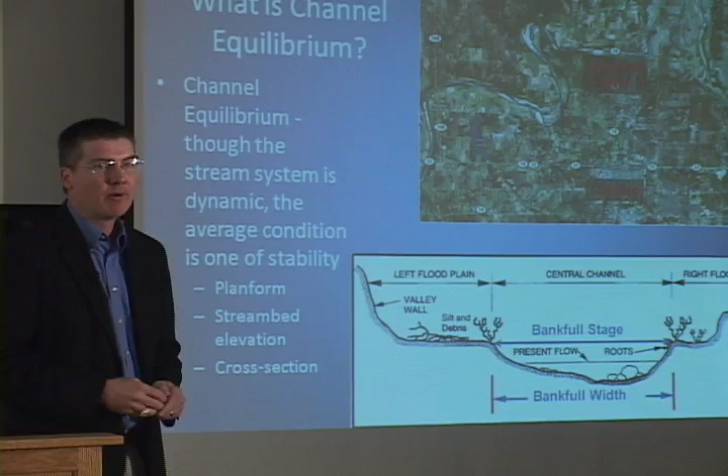What I want to start off by saying is I want to start with a bigger picture view of streams. Streams are dynamic, okay? The pictures you saw today, the aerial photo and the stream moving, okay? Streams want to move, all right? They don't want to stay in place. They do want to get to an equilibrium state, but that equilibrium state is one where it is dynamic, okay?

And streams have a different equilibrium, or a different dynamic state, associated with them. We can talk about that in terms of plan form, but we can also talk about it in terms of stream bed elevation, okay? So stream bed elevation can change, it can move up or down. And we can talk about it in terms of its cross-section, okay?

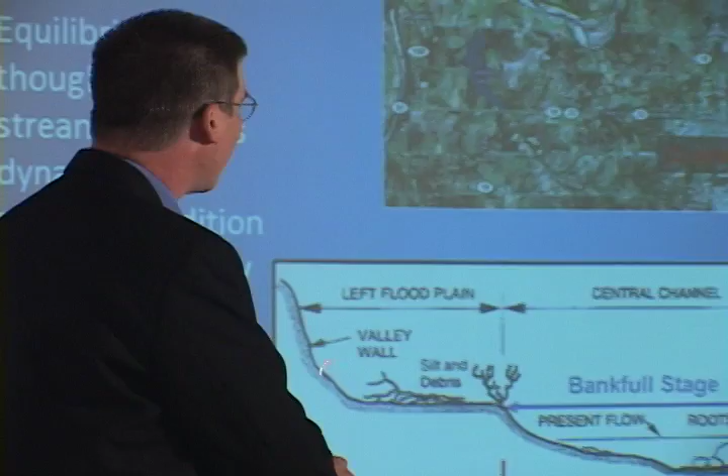Streams are not intended to be channels that look like open pipes where the water just runs through. They are actually supposed to spill over onto their floodplain, because in a lot of cases we have floodplains that have vegetation on the surface, right? And that vegetation interacts with that water and it interacts with that sediment, okay? So we need to keep these things in mind when we start talking about stream systems.

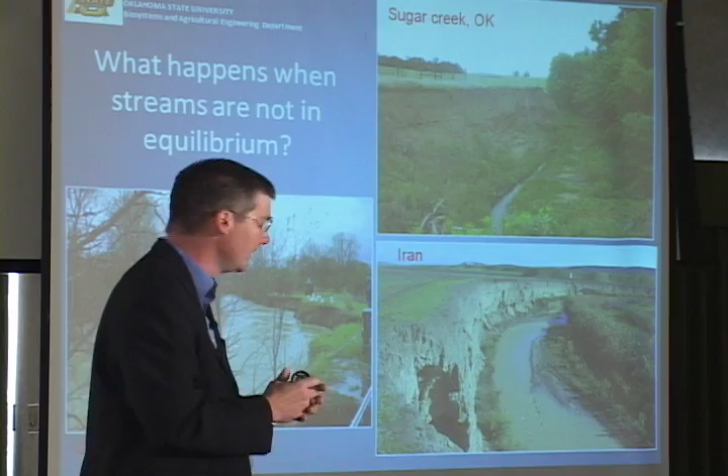Now there's a lot of different ways streams can get off of this equilibrium, and a lot of different ways you can start getting issues with streams, where they can start migrating faster than maybe what they naturally should, however we might define natural, okay? Some of those disturbances include in-channel disturbances, okay? Anybody had any streams straightened or dredged, okay? We have those issues in Mississippi, we have those in Oklahoma, okay? That can throw a stream off of its equilibrium, okay?

Ag activities, okay, can have an influence on what happens with streams, either positive or negative. Urban areas, somebody mentioned urban areas in the back, okay? When you have an urban area and put increased impervious surfaces on the landscape, that water's got to go somewhere. It's not going into the ground, it's going to run off into the sewers, and then eventually from the sewers and drainage ditches, right into the stream. And it's a very high carrying capacity for water and sediment.

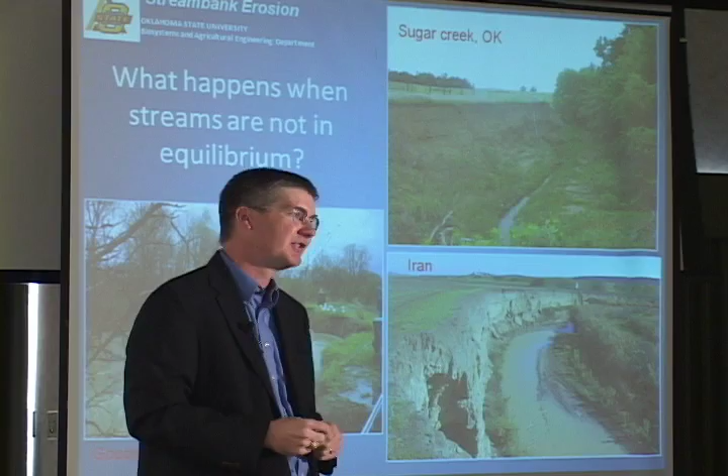These are some of the streams that we've studied or investigated or played a role in, in several different parts of the country. Goodwin Creek, Mississippi is probably one of the most famous studied stream bank sites that I know of. There's more data at Goodwin Creek than any other stream bank site I've seen. This is Sugar Creek in Oklahoma. It's a sugar sand, and if you can only imagine how fast the soils erode there, if you're talking about a sugar sand. And we've also looked at pictures from Iran, pictures from Iraq, pictures from all over the place where these processes are occurring.

And when streams get out of equilibrium, what ends up happening is you see these very steep banks, okay? Because they can get out of equilibrium in several different ways. One way is the stream bed can actually cut further and further down. Now from what I understand about your Minnesota rivers, you kind of had a glacier that helped to do that a little bit, right? But that's a process where the stream got kicked out of equilibrium.

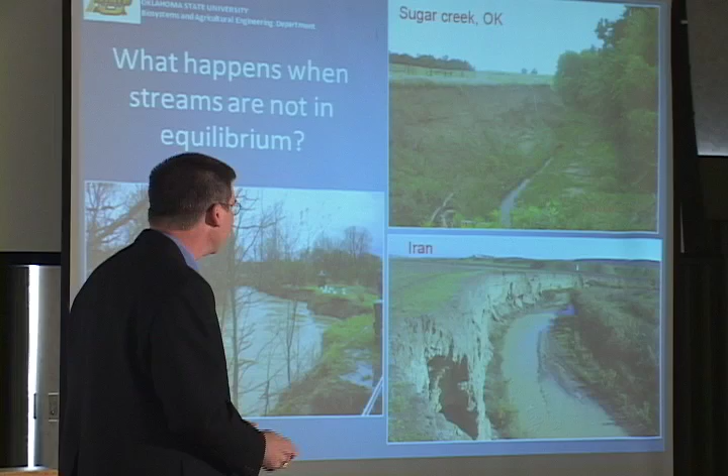Okay, but when they get steep, then these banks become very unstable. What I'm going to try to do is give you some fundamental background about how we can quantify some of that stability. Now there's something that has been developed by researchers across the country that talks about the migration, the patterns, and the processes that streams undergo.

That's referred to as the channel evolution model. It consists of basically 6 different stages. Stage 1 is a pre-modified natural channel. The bed's probably pretty stable, or it could actually be coming up—we could be having aggradation on the bed surface—but that's stage 1.

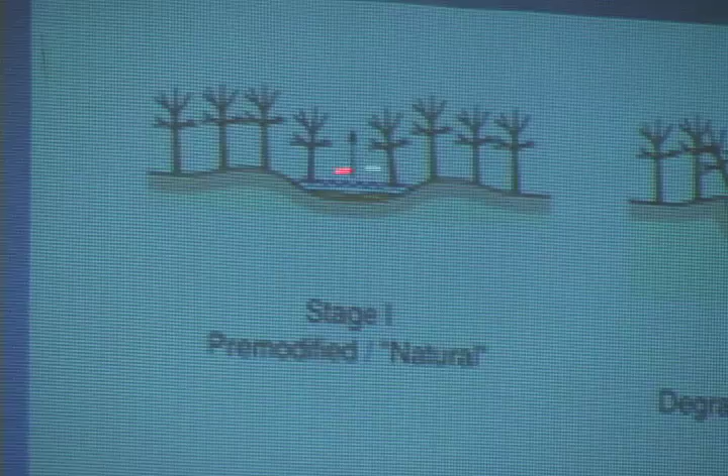Typically, if there's some kind of disturbance in your system, you go into a stage 2 channel. In a stage 2 channel, your stream bed starts to drop—we get degradation. So basically we get some erosion of the banks, but the bed is starting to drop a little lower, and you're starting to see the banks start to steepen up.

Stage 3, the bed gets even further down, the bank slopes get higher, these become more unstable, eventually leading to a stage 4 where you get degradation and widening. So the bed's not only going down, now the banks are starting to collapse in.

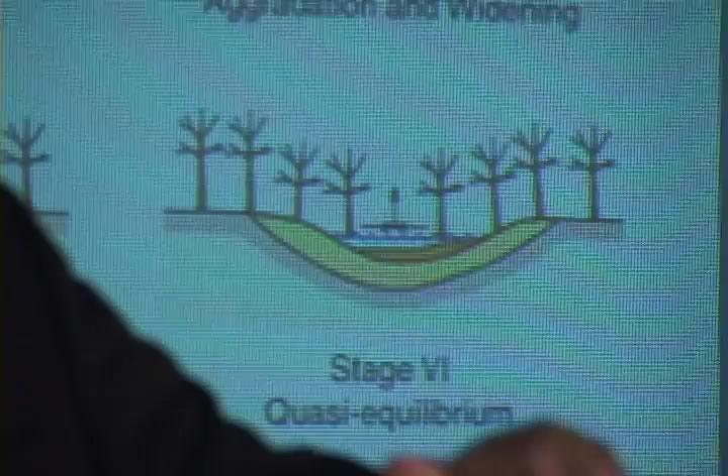What researchers hypothesize is that eventually, after stage 4, you get to a stage 5 and a stage 6 process where the streams almost naturally heal themselves. The bed's dropped far enough below, it's widened out, you get aggradation of that material onto that stream bed, and what ends up happening is you have a stream now with almost a dual floodplain system, almost reconnected back to its own newly formed floodplain.

A lot of times what we see—and I've heard a lot of talk about this in the last couple of days I've visited here—is you see nick points that start developing, and those nick points typically migrate upstream. So what we typically find is that these stage 5 and stage 6 streams are usually downstream where we've got an aggraded bed.

It could be coming into a reservoir. And then typically where we're seeing a lot of the failures and a lot of the stream bank stability issues are right below that nick point. Some of our more stable stream sections are actually upstream of that nick point.

So kind of the take-home message from that is that stream bank erosion can be significant. Drew's results basically demonstrated that extremely well this morning. And it's not only here in Minnesota.

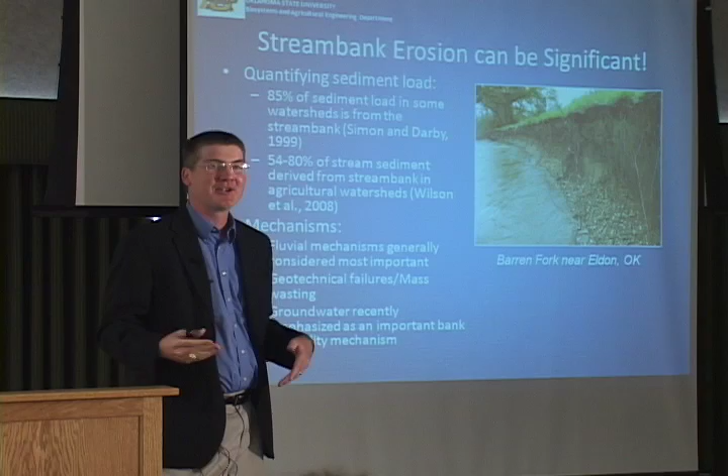It happens everywhere. Andrew Simon, who was at the National Sedimentation Lab, did a lot of work in some southern watersheds, especially in Mississippi. They found as much as 85% of the sediment load in some of those watersheds was coming from stream banks. There's been other studies in agricultural watersheds where it's 54 to 80%. And it's relatively new, because a lot of the stream bank work actually started about the 1970s, 1980s, and people started looking at these processes.

So this is not a situation that just occurs in Minnesota—it occurs in other places. Now, what I want to tell you about today specifically is a lot about the mechanisms that actually cause these banks to collapse, because I think if you understand the mechanisms, then we can start to understand some of the possible solutions, if there is a solution.

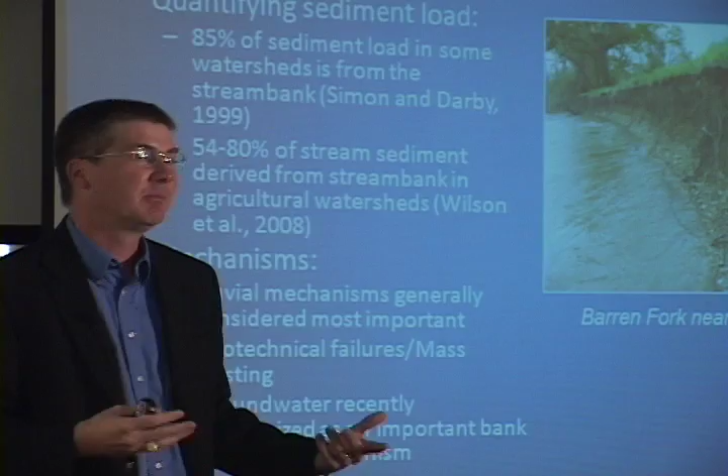And in my opinion, as an engineer, I think I have to do this as an engineer. As an engineer, I think I can have a solution to anything—it just depends on how much money you want to pay me. So if you want to write a $2 million check today, I think I could probably do something. It might not solve it forever, but I bet I could slow it down.

Some of those mechanisms, and this gets a little bit scientific—I think when Warren invited me to come, he said, well, we want to know the state of the science. Those mechanisms include fluvial mechanisms, and what I'm talking about there is just the stream flow.

When the stream flow gets up, stream flow is going to erode particles—it's going to erode sediment, erode it on the bed, erode it on the banks. One of the other mechanisms where you can get sediment loading into streams from stream banks is something called, it's a fancy term, geotechnical failures. It's basically just a collapse.

But these things don't occur independently—they're combined, they have an interplay with each other. The other thing that can cause a bank to collapse, and one of the really, really interesting problems that Dr. Gupta is working on here, my research team is working on in Oklahoma and Mississippi, is that groundwater can actually be a very important player in causing banks to erode. We'll talk about that more as we go.

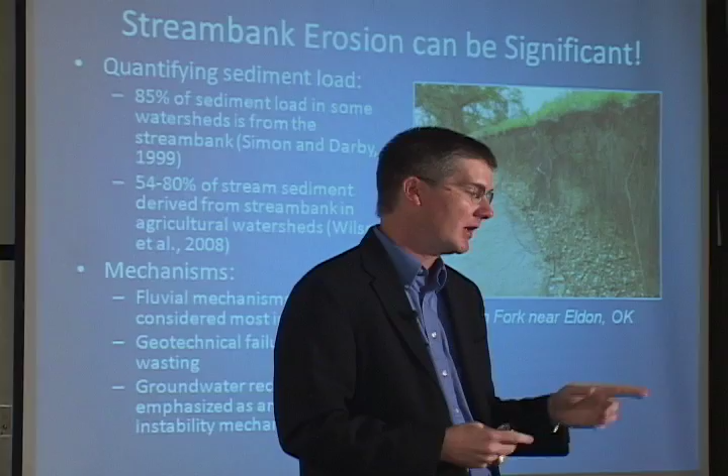I'm going to show you a laboratory experiment that we did. You're going to see it twice today, but I wanted to show you this up front because I wanted you to get your mind wrapped around a bank collapsing and what it looks like and what are some of the processes.

This bank has a couple of different layers in it. There's a more non-cohesive layer here, like a sand layer. And then there's a topsoil material right here. What we're doing is looking at the stream, which is basically here. If we could somehow, if we were Superman, we looked inside the soil, this is what we're looking at.

What you can see is what typically happens in a lot of banks - I'm not saying this happens here in Minnesota, but in a lot of banks we'll get some kind of undercutting formation that occurs at the toe of that bank. That undercutting formation can be by stream flow, fluvial, or by groundwater. It can be by a number of different mechanisms.

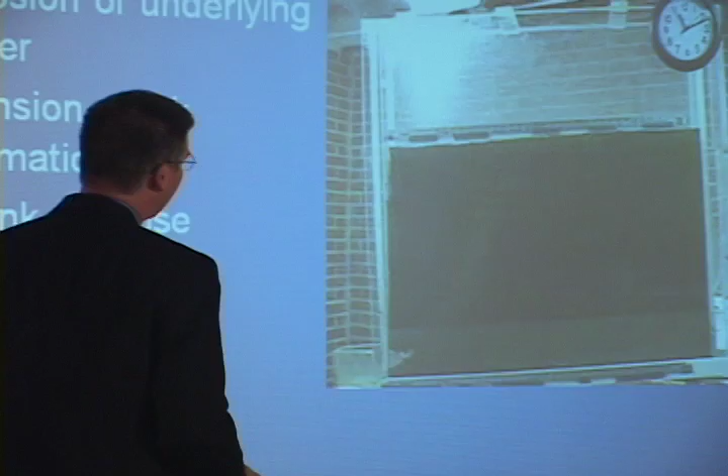And then what eventually happens is when you get an undercut bank, you get something called a tension crack that forms in that bank. That tension crack, usually in 2D it's a line, but in 3D it's usually circular. That tension crack usually reduces the stability of that bank, and then it can basically cause that bank to collapse in. So we're going to keep that in mind as we go throughout the presentation.

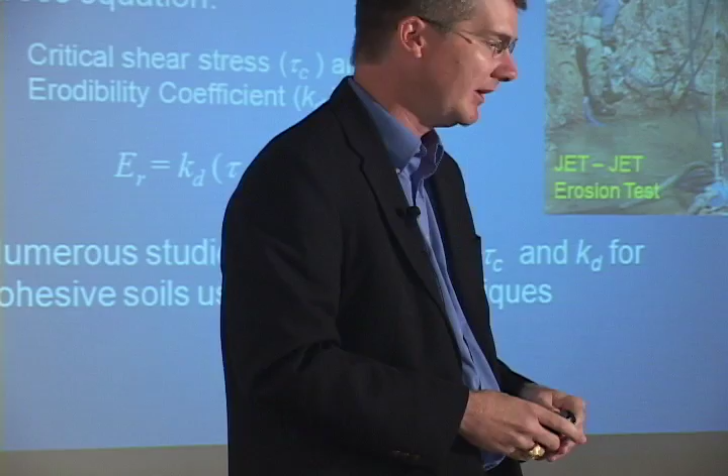So how do we handle fluvial erosion? From a scientific or applied perspective, if we're going to go out and analyze a bank, how can we determine the susceptibility of that bank to fluvial erosion? I promise you, I had a hard time, but this is the only equation I have in the presentation, and it's not that difficult of an equation.

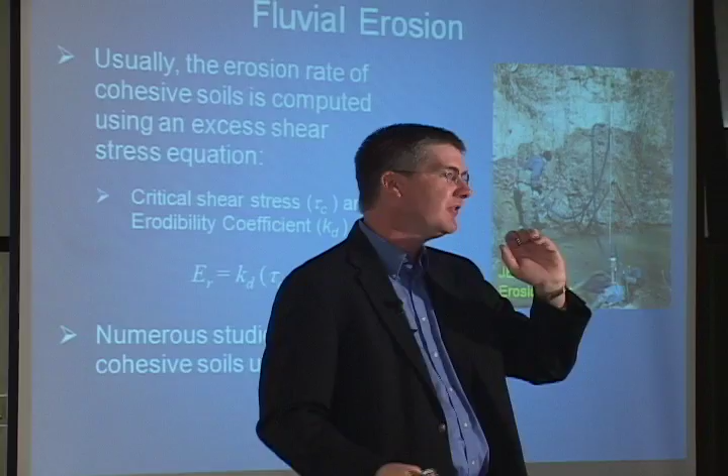It's simply linear. This little 'a' is just 1 - I could have probably even left that out. Most people assume that value to be 1. This is an equation called an excess shear stress equation. For you guys, all you need to think about is it's basically just a force equation, and as an engineer, we like to study forces.

This term, the Greek letter tau, is basically how much force I have to put on the sediment before it starts to move. This other tau parameter is how much force the water has. So all this equation is saying is how much force do I have compared to how much force do I need to make it move. If I don't have enough force, it won't move. If I have a lot of force, it will move. And the rate at which it moves is this little k value - that's basically how we model a lot of erosion due to fluvial forces.

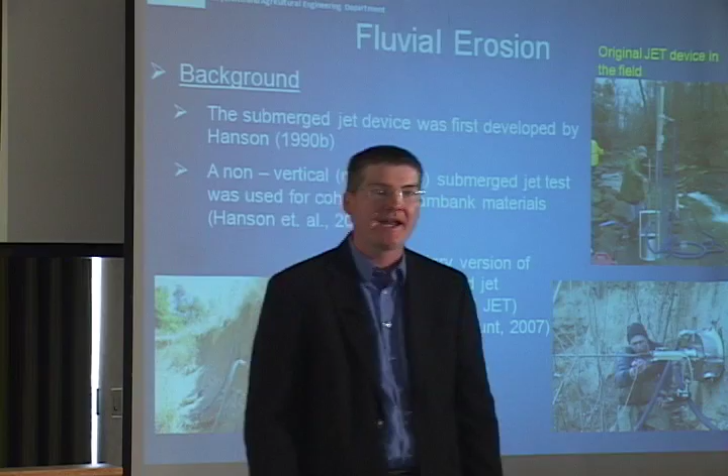Now those parameters - there's a number of different ways to estimate them. Sometimes it's easy, sometimes it's not so easy. But there's a very good technique developed by Greg Hanson at the USDA ARS Hydraulics Lab in Stillwater, Oklahoma, called a jet test - a jet erosion test.

This jet erosion test is something we can use out on a stream bank. We put this thing up against a stream bank and force a jet of water to impinge on the bank, and it causes a scour hole. Based on the size of the scour hole, how fast it forms, and what the equilibrium depth is, we can estimate those two parameters for your stream bank.

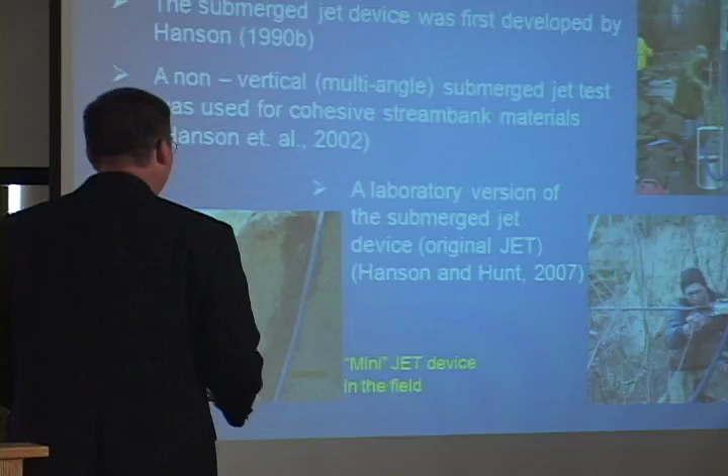So we can come back and say, okay, this stream bank has a tau c of this and a kd value of this. Then we can look at the force of different stream flow events and know how much fluvial erosion actually occurred due to that event. He's even developed something called a mini jet, which makes it even easier to use out in the field.

So that's one part - the fluvial part. But the question is, I told you there were more mechanisms than just fluvial. There's also the failure, right? I think that's Dr. Gupta.

We need a way to figure out whether banks are going to collapse and how stable they are. Based on the banks I saw yesterday, you have a lot of unstable banks in Minnesota. I grew up in Texas, and they said everything's bigger in Texas. Well, based on what I saw yesterday, there's some stuff bigger in Minnesota.

Slopes fail a number of different ways. When we have a bank that fails, it can fail a lot of different ways. One of the ways we can have a bank fail, and this is for any slope, it doesn't have to be a stream bank—it could be a landslide in California. All of the analysis is basically the same, which makes it really neat.

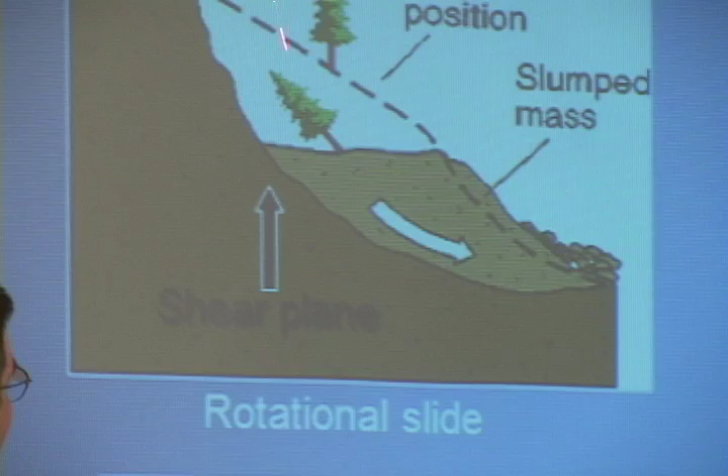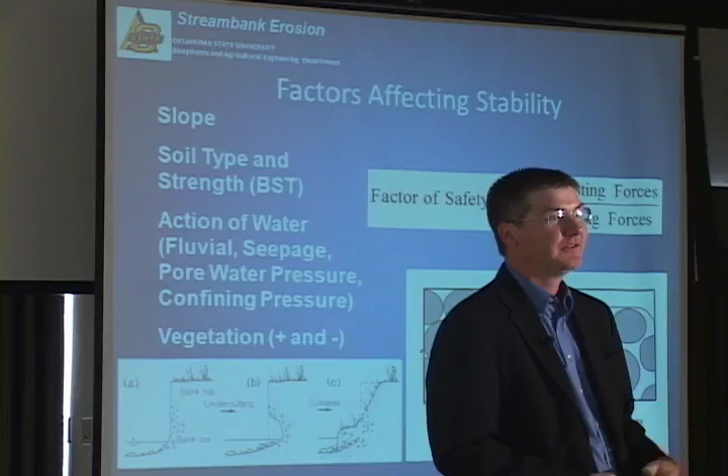So what factors do we have to measure to figure out whether a bank is stable or not? These are important factors that you need to consider when you're looking at your system. One of those is the slope. The slope has a direct correlation to stability—the steeper the slope, the more unstable you've got. So slope is a very important factor.

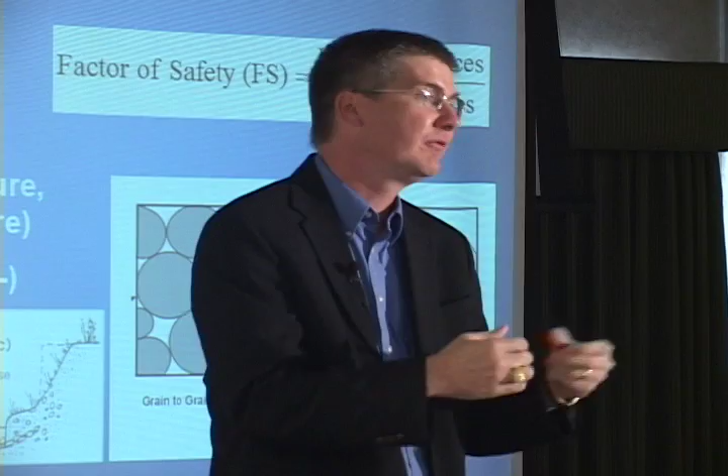Another very important factor is the soil type and the strength of the soils. Not all soils are created equally, and not all soils have the same strength. When we talk about strength of the soils, we're really talking about the intermolecular bonds and the frictional resistance between different soil particles. There's a couple of parameters there we call the cohesion and the internal angle of friction, and those parameters are very important for quantifying a bank.

I can modify those parameters, I can change those parameters. I can take two different soils with the same slope and get drastically different results because the strength is different. The other thing you have to keep in mind, and this is where the implication comes in for you and your management and land use, is the action of water is very important from a stability perspective.

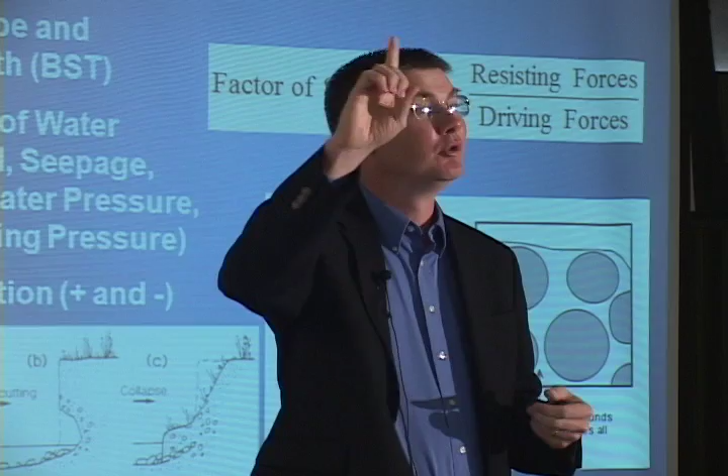We already talked about fluvial—that's one way water can act on a bank, the stream flow can act on that bank. You can also have something called seepage, and I'm going to show you a lot about that in just a minute. Seepage has an impact on your bank material.

There's also something called pore water pressure. When I grew up in Texas, I grew up on a beef cattle farm, and I don't know how, but fences got torn down all the time. We didn't have the nice little implement you put on the back of the tractor to drill the hole and put the fence in—we used a post hole digger. I can tell you what would happen if I went out to the field and tried to put in a fence post when the soil was really dry.

Oh, it's horrible, right? That's when I said we should let my brother do it. So we should let him dig that hole. I figured out pretty early that if I wait and let it wet up a little bit, that soil is going to be easier to dig out.

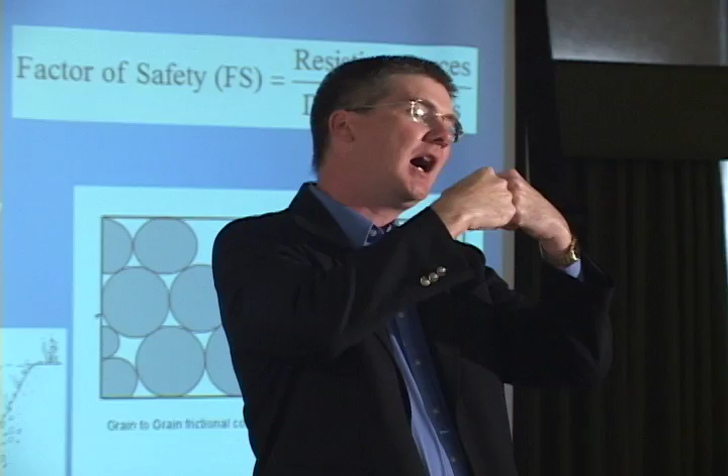And it's the same thing with a bank. Remember, I was talking to you about these grains being in contact and having a bond with frictional resistance. Well, if you put a little water in there, it's almost like having a little viscosity between that—it helps those grains move a little bit more. So water is actually one of the ways in which we can reduce the strength of the soil.

The other thing water does is it provides a confining pressure. When the stream stage is actually the highest, one of the things it does to that bank, even though it's eroding particles, is it actually helps the bank hold up. So that's another force that water has.

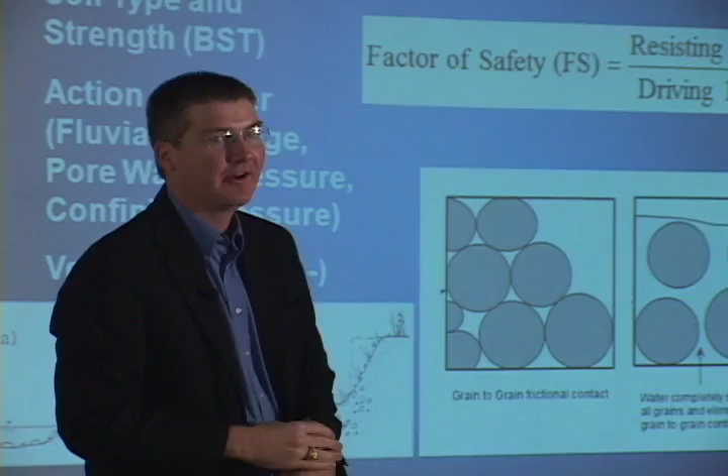One of the other forces of action of water I don't have listed up here is freezing and thawing. One of the most interesting things I saw on the Goodwin Creek stream bank in Mississippi is when we had one freeze event that year. When I went out - lucky, right? I come up here for the summers, I'll be back down there for the winters. With that one freeze event, it was amazing - you could go out and basically peel sediment off the bank, about 2-3 inches thick. So freeze and thaw are very important for stability. It's a way that we can remove material.

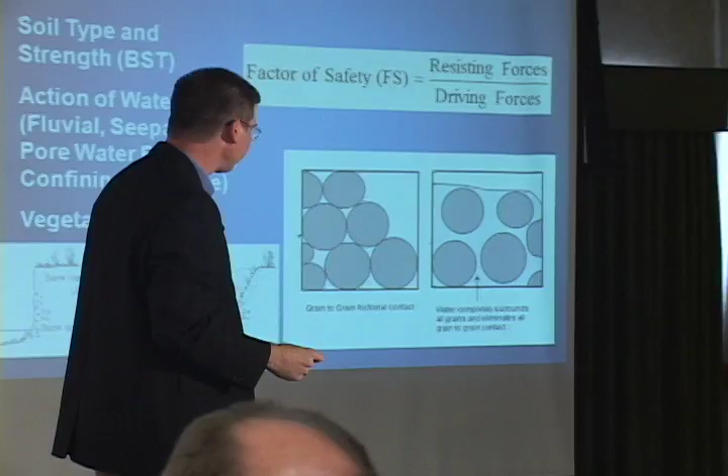Vegetation, we talked about a little bit earlier today. Vegetation is important for stability, but there's actually a fairly large debate right now, the fact that vegetation has both positive and negative influences on the stability of a bank. It depends on what kind of perspective you look at. We're going to talk about that more in the next slide.

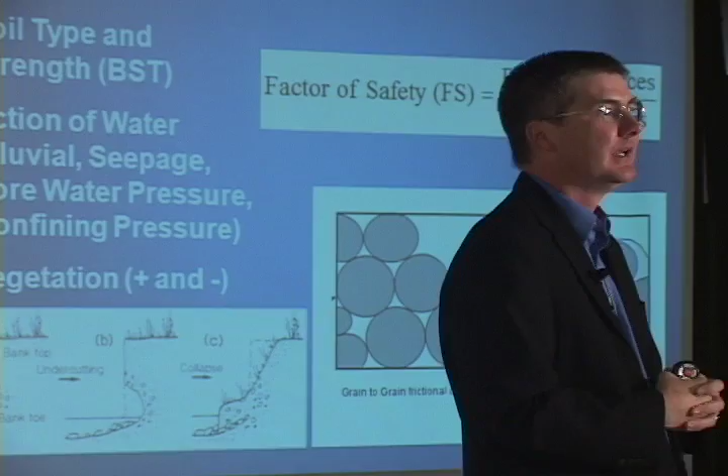The way that we calculate stability is using something called a factor of safety. A factor of safety is very simple - it's just the resistive forces, what's holding the bank up, divided by the driving forces, what's causing the bank to collapse. So when your factor of safety is equal to, or less than 1, what happens? It's gone. So if you're sitting in your lawn chair with your computer, and I'll show you a computer program you can use in a minute, and you calculate factor of safety and it says less than 1, back up. If the factor of safety is greater than 1, you're stable. And so we have a tool that we can use to do that.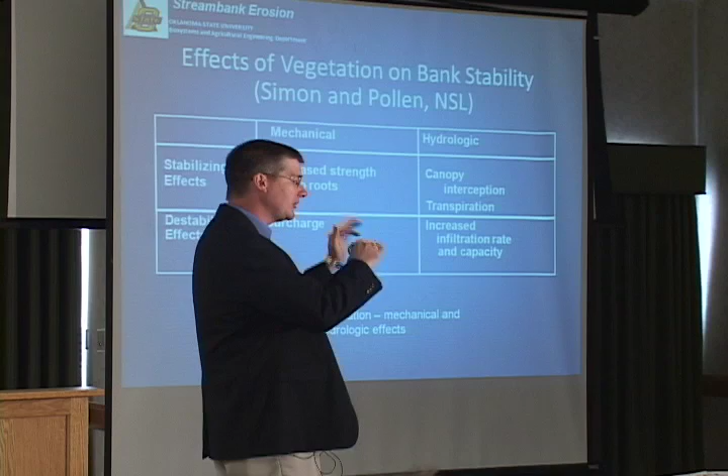Now let's talk a little bit more about vegetation. Why did I say positive and negative influences of vegetation? This is primarily going to talk about vegetation on the top of the bank, and we can also talk about vegetation on the face of the bank. It has both mechanical aspects and hydrological aspects.

The mechanical aspects are that the roots increase the strength of the soil. The best analogy I've heard to describe this is that roots are like rebar in concrete. If you've ever laid concrete and put the rebar in, you know how strong that material can get. Roots are like rebar. To stabilize a bank, you need a root system that's as deep as you can get, with a very nice root system associated with it.

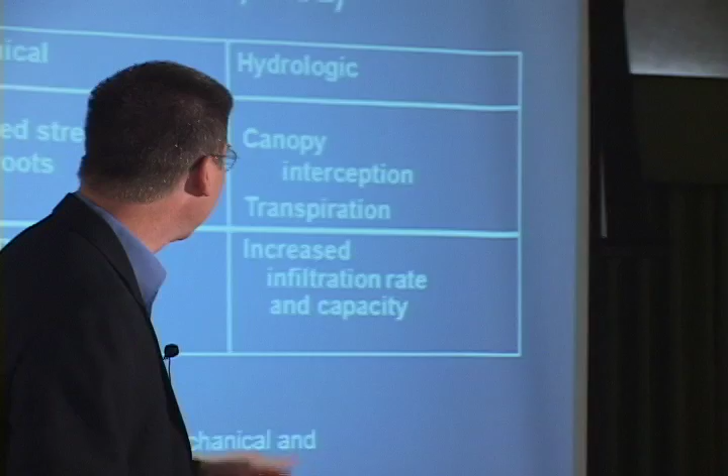From a mechanical aspect, the negative part is actually something we call the surcharge - that's just a fancy way to say it adds extra weight to the bank. I can promise you, we had discussions with the U.S. Army Corps of Engineers in Sacramento. Sacramento's got levees, and they've got large trees growing on their levees. They were debating, as recent as a year or so ago, whether there was too much surcharge by those trees on those levees.

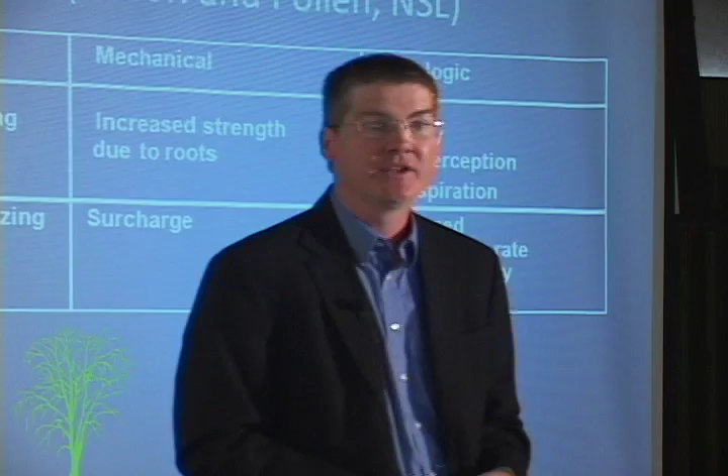Vegetation also has a hydrologic influence. One of the things vegetation does is it intercepts the water before it gets onto the bank, so you get interception. That material is stored on the leaves and generally it evaporates right back out, so you don't have to worry about that water being in your bank. The other thing vegetation does is it actually takes water out of the soil, and that's a good thing because it can help with the stability.

There's some work that has suggested that vegetation can actually increase your infiltration capacity, though - that there can be macropores and openings next to roots, and it can actually cause increased infiltration capacities through there.

So let me show you how you calculate the stability of a slope. Okay, so we've got all these forces, all these different things that come into play.

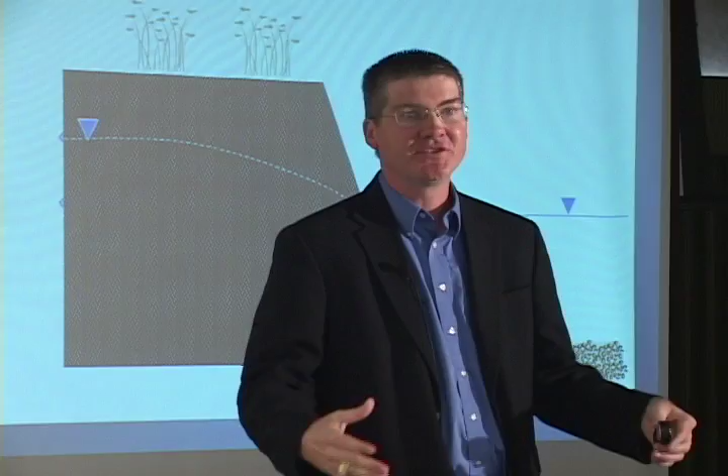All you got to do is figure out where the failure plane is, which is not a trivial task. Then you got to put all the forces in, decompose the forces in their different directions. You got to figure out the pore water pressure, decompose that into its different directions. And then you got to figure out the resistive force, which is based on the cohesion and the internal angle of friction. That's all you got to do.

It's as simple as identifying what bird is based on its feet. So if you can do that, you can do this. But yeah, no, this isn't easy.

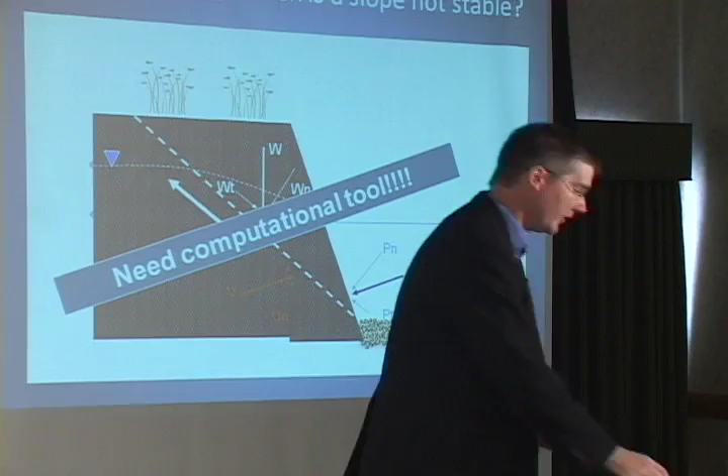So what we use is computational tools that help us do this. There are several different computational tools out there, but I'm going to show you one that's been designed specifically for banks. It's called the Bank Stability and Toe Erosion Model, developed by Andrew Simon and colleagues at the National Sedimentation Lab.

It simulates a 2D stream bank. It estimates the fluvial erosion, estimates the factor of safety, and then comes back and updates the bank profile. So you can actually simulate a bank on your property, put in the parameters, and simulate the process over time.

This is a bank. This is BSTEM, one of the menus in BSTEM. Don't worry about all the other stuff, just watch this bank here, and I'm going to show you what BSTEM will do.

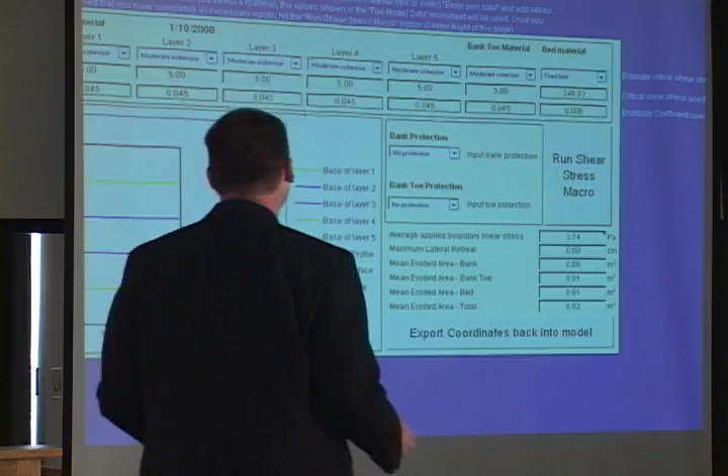BSTEM is going to run a series of simulations. We're at about January 2008 here. This is just a hypothetical bank, not your bank.

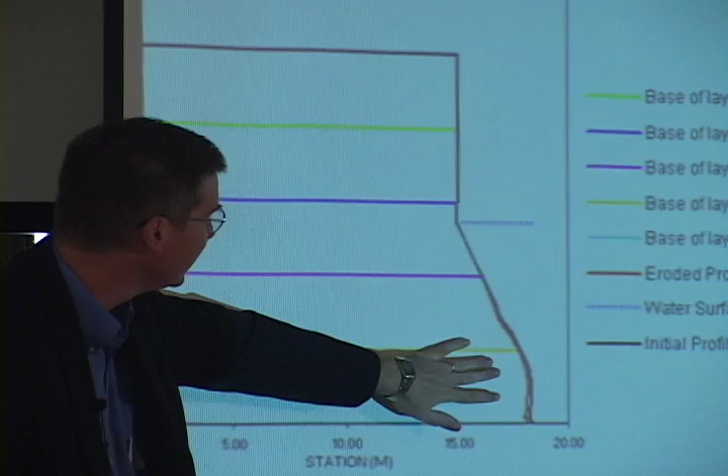What you can see is it will erode the toe a little bit. There's a stream flow event happening, it erodes the toe, this jumped just because of the input in the figure. You see a little bit more erosion, a little bit more erosion. The stream stage is actually up, so we've got some erosion happening. It continues to cut, continues to erode. We got lots of erosion.

We had a big flow event, the stream stage is all the way up now, and we've even got some erosion of this top material. What you can see is that material has gotten steeper. Water level went back down, and then we've got a bank collapse.

You can run that for a bank, and we can understand the properties of the bank. What this really helps us do is not necessarily understand how the bank operates over time, but it helps us look at solutions to solving an issue if we want to try to stabilize this bank.

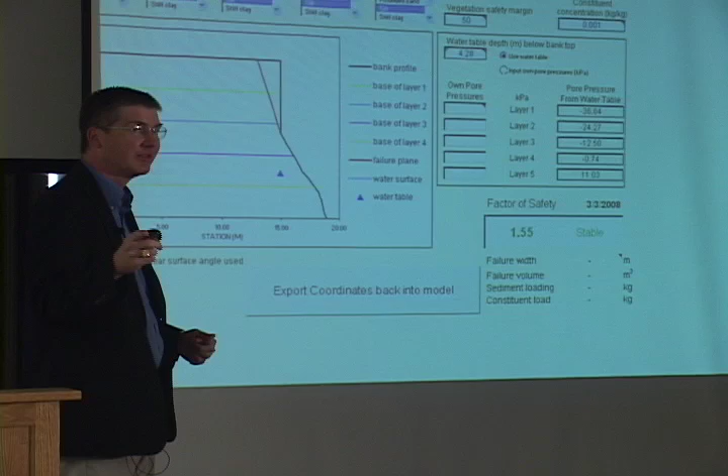This is a bank, and I'm going to show you a couple of different things, and this is where the quiz is going to come from. So pay attention. Here's the factor of safety we were talking about. Factor of safety less than 1 means get out of your lawn chair, scoot back. Factor of safety greater than 1 means you're fine, have another drink, whatever your choice is.

So here's the bank, same bank we were dealing with. Here's the failure plane, and this is actually the groundwater table. Remember how I was telling you that groundwater is important within this system? This is the groundwater position, and we're at a 1.55. We are a stable bank to start with.

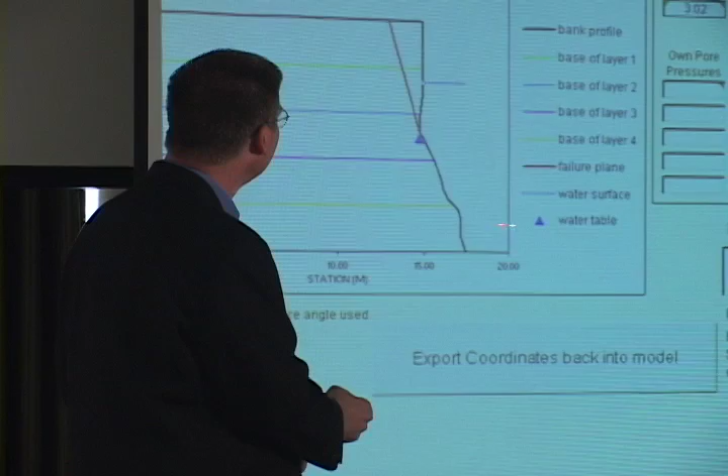Then let's go through a storm event. So we have a storm event that occurs, the stream stage rises, and we get a little bit of erosion here. Uh-oh, what's the erosion done to our bank? Well, it's made it steeper. Uh-oh, that's reduced stability. Okay, what else has happened?

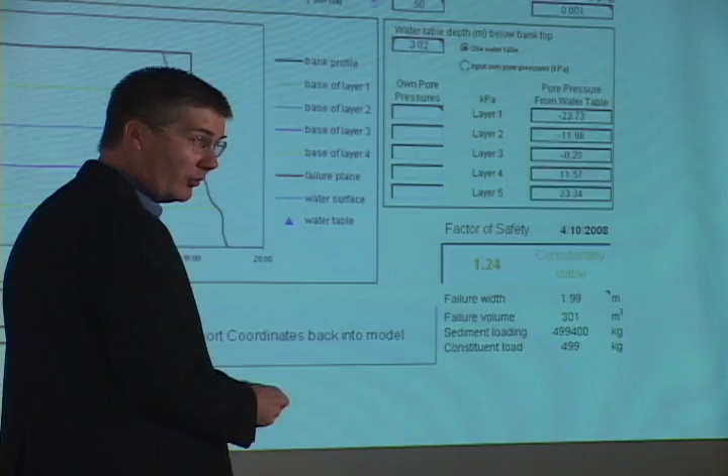The groundwater table comes up. What happens when the groundwater table comes up? It's easier for me to dig that post hole, right? The soil ends up getting wetter. And if you're going to compare two banks, same soil material, same slope, one's wet, one's dry, the wet one's heavier, so it wants to collapse. Also, the cohesion here is less in this bank, and we've got a 1.24 factor of safety. Some people call that conditionally stable, meaning it's stable, but we're not sure because there's uncertainty in the parameters. But in general, it's stable, as long as you measured your parameters right.

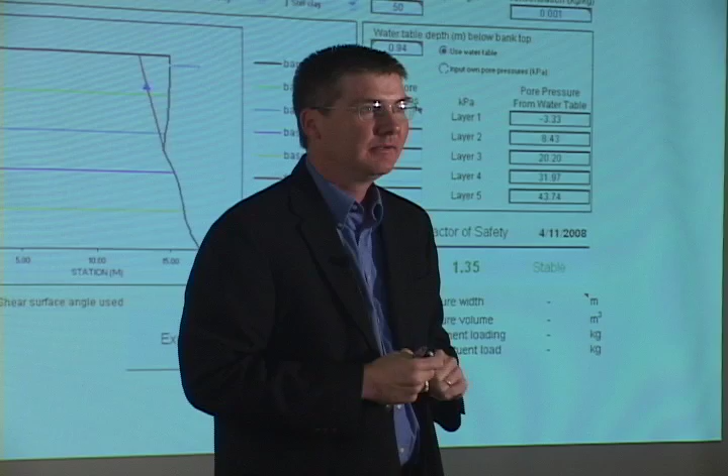Okay, this is the next step. The stream stage just went up higher, the groundwater table went up higher, and the factor of safety went up. Do you know why?

Water's holding it. The water's confining it and it's holding it up. So the factor of safety actually went up a little bit.

Now, what ends up happening is typically when you have an event, you've got the water table high, you've got the stream stage high. Which one of those is going to drop first? Stream. Excellent, you guys are hydrologists. So yeah, stream stage is going to drop first. Groundwater table is still going to be high. Factor of safety's in trouble, and we've got collapse.

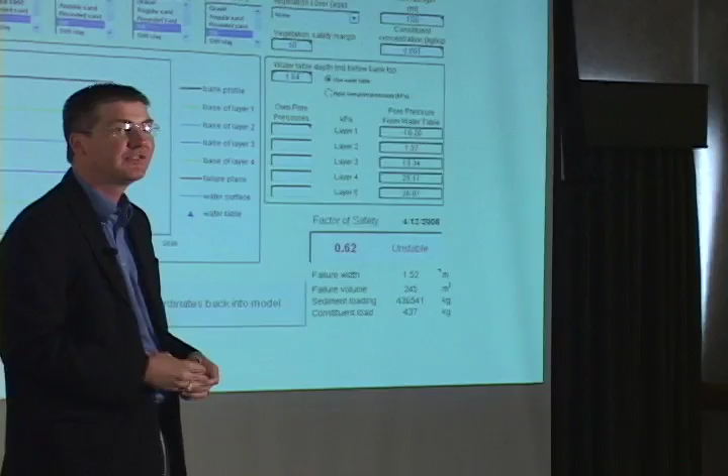And we've got tools available that we can do that, and it's all process-based. It looks at the processes that occur. And what's really interesting here is it's not one or the other. If you go out to your bank and say, oh, my stream flow is killing my bank, I would probably tell you no, it's probably not that by itself. It's probably a combination of these two things.

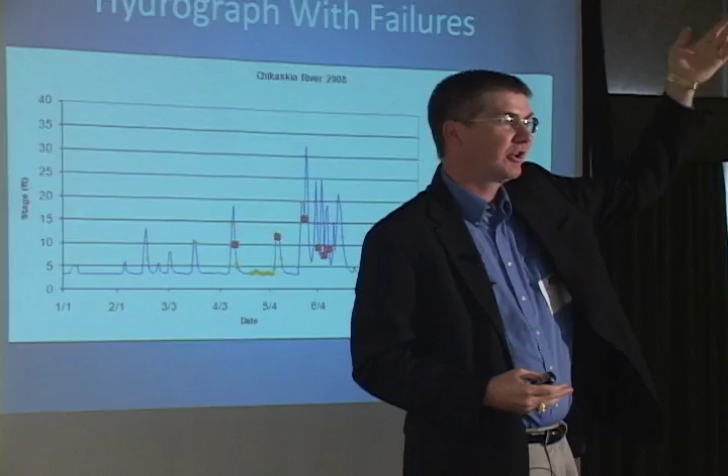This is a hydrograph for some banks that we studied in Oklahoma, and one of the things I want to point out is the same thing you guys just noticed. This is the hydrograph, water level versus time, and these red dots are where we saw a collapse. What you see is the collapse doesn't occur when you have the highest water level, the highest flow. It occurs a lot of times when that water level drops back down. So the whole interplay is very important.

Let me talk a little bit about what we've seen relative to seepage. The banks that we toured, we had a fabulous tour yesterday. I think you should all sign up for the tour. I think that's later today, right? You should all sign up.

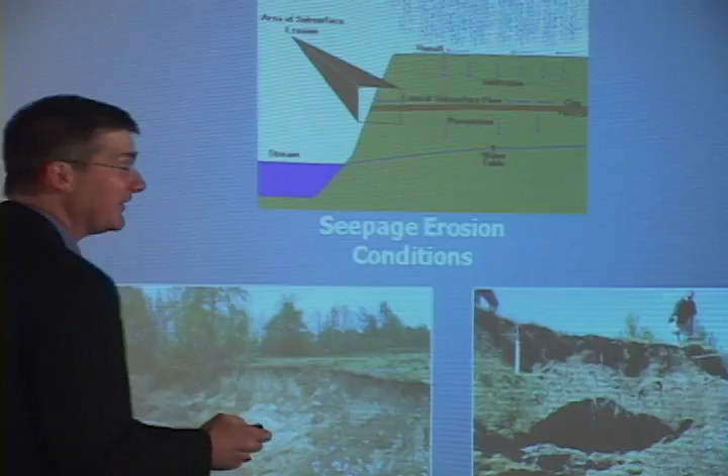You should go see some of these, and I think Dr. Gupta is going to show you pictures of these banks where it looks like we have seepage processes going on here in this watershed. I'm going to show you a little bit about what we've done in some different places and how some of the processes might be similar.

Seepage erosion is a process which occurs basically when we have a lot of pore water pressure and a lot of water in our banks. We might get precipitation that infiltrates, and a lot of the banks we studied in Mississippi have this clay horizon. It comes down, hits this clay horizon, and then it's got to go laterally. And when it comes out laterally, it can cause erosion of that bank.

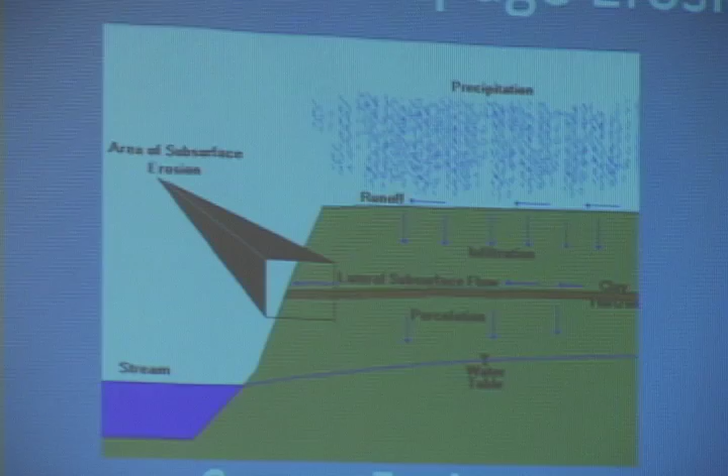Now, one of the interesting things we see in Oklahoma, and in some parts of Mississippi, we've seen it in other places like Kansas, is cave-like structures on the side of our banks. Those caves are actually where the seepage is coming out. There's one spot where the seepage starts to come out. And what some people have suggested is that while seepage might occur over a long distance of the stream, when it starts to come out in one spot, you actually start to converge the flow to that spot.

And so we actually see some of these—I have to call them undercuts because the gully guys that do head cuts don't like that term. These are some of the bank failures that we've seen. This is Dr. Glenn Wilson, who is one of my co-PIs with the National Sedimentation Laboratory. You can see some of the undercut features there on these banks, caused specifically by seepage erosion.

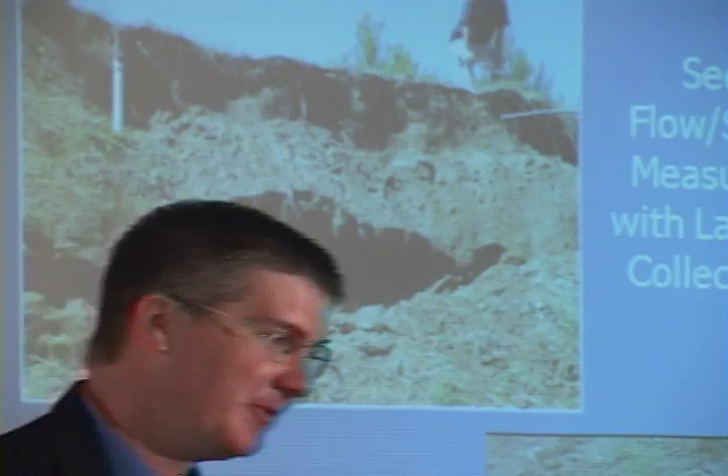We've actually gone out to these banks. We usually send graduate students because it's very treacherous. But what we will do is try to find these seeps, go in, and put in lateral flow collection pans. We'll collect data coming out of this seep to look at flow rates and sediment concentrations, basically to better understand the mechanism.

Here's one of the seeps that's on the side of a bank. It's coming out of old slough material, and once it causes a seep, it can undercut it and then cause that bank to collapse.

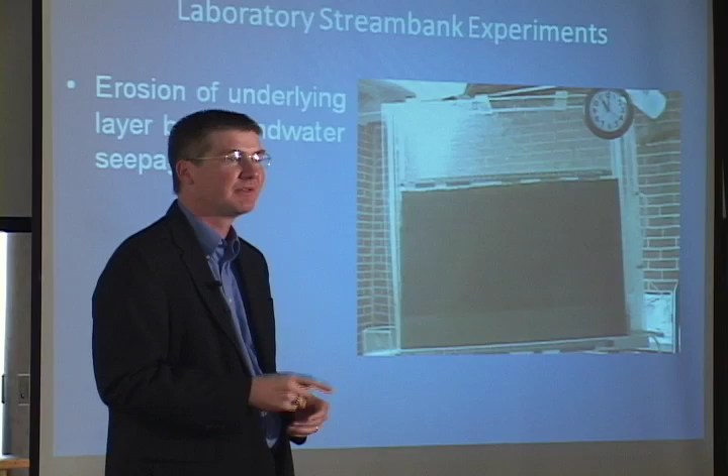This is the lab experiment you saw earlier, right? So you say, I've seen that already, but maybe you were asleep the first time. This is the same thing. I didn't tell you how this was eroding, but what we're doing is filling this backside up with water, and water is actually flowing through this layer, causing that to undercut just by groundwater.

There's no surface water acting here, it's all just groundwater. And groundwater by itself can cause that bank to collapse. We've done some modeling work, remember that factor of safety term we talked about? We did some modeling work to show that undercut actually causes the factor of safety to decrease really fast.

You don't need much of an undercut to cause instability. We've even done some three-dimensional laboratory experiments. We went to a three-dimensional case because we didn't want to look at just 2D, we wanted to look at 3D. This is a sand soil.

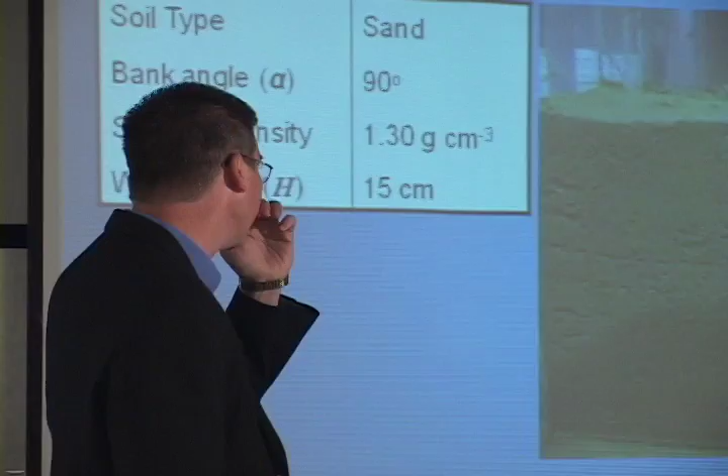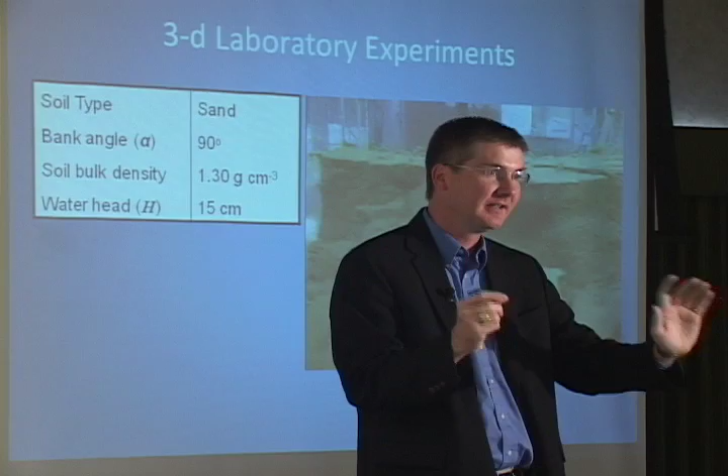These are very simple cases because a lot of people don't understand the mechanisms, and we wanted to understand those mechanisms. This is a sand soil, packed pretty light. What I'm going to show you with this soil is you get a little bit of water come out, but what you'll notice about this bank is, bam, it's gone. Where's the undercut? The bank wasn't strong enough to hold up to the seepage force. When you have seepage moving through a bank, water molecules are traveling through the soil, basically pushing, and those water molecules just push that bank out.

If I go to the same soil, but increase the bulk density, I increase the strength of the soil, then I see an undercut, and then it collapses. So depending on what kind of soil you have, seepage may never show itself. You may never see a cave, you may just see a pop out, and never know it's there.

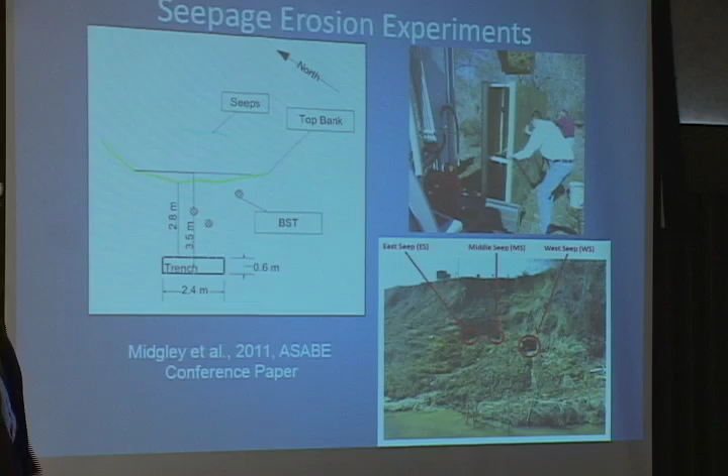We've also done some additional seepage erosion experiments in Mississippi. We just got done with this, this is kind of hot off the press type stuff, we just submitted a conference paper on this. One of the things we like to do is try to make banks collapse, which is kind of not a good thing, but we do like to do that.

So one of the things we did is we identified a location with seeps. Here's the bank, here's some of the seeps that we ended up forming. We actually put a trench in, I don't know why the landowner let us do this, but he did. We filled this trench up with water, and then we had basically instruments. There's our trench that we're putting in, it was about 8 feet deep.

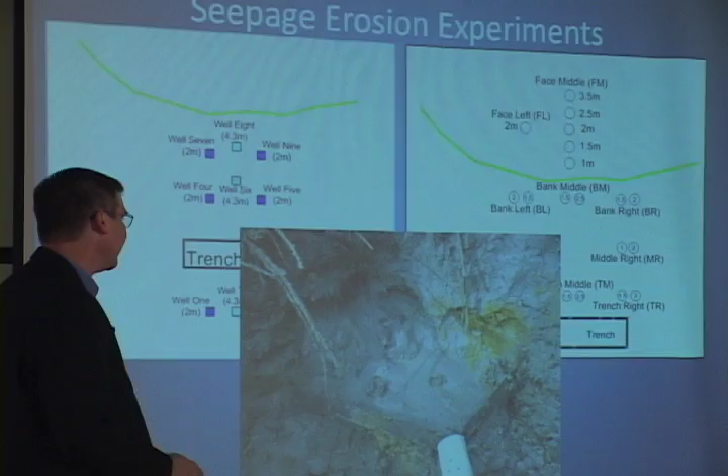We had instruments, observation wells, and tensiometers to measure how the water's flowing and what's happening. We measured what was going on within the system over time. What we ended up having is in identified seeps, we had a lateral flow collection pan, routed to a PVC pipe that we could route down and then collect measurements over time.

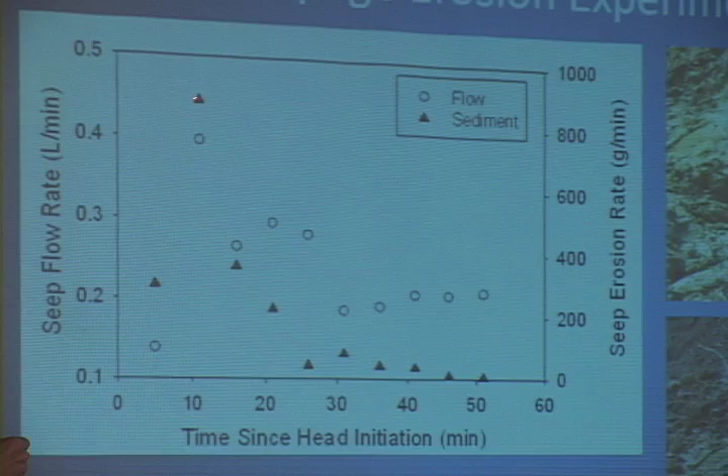We did the experiment two different ways. One way was we'd let the seepage come out and the material would deposit, so we'd have a collapse, and that material would be deposited there, and the water would still have to flow through it. What you notice in this graph is we have a really high erosion rate, that was a failure that we got. Then what happened to the erosion rate? It dropped. What we ended up seeing in that case is that the seepage almost self-healed itself, because you got a collapse, the collapsed material laid on top of the seep, and wouldn't let it go, until all of that material basically liquefied and could move. But it took a long time for that to occur.

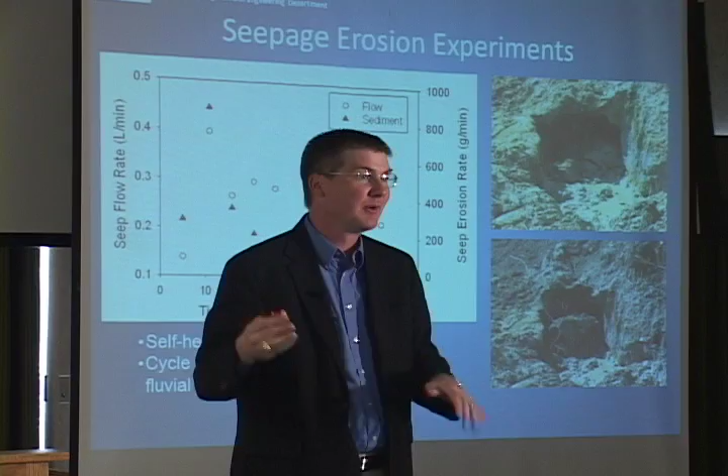We did another experiment on the same seep, same flow conditions, everything the same, except this time when it failed, we took it out, trying to act like we were a stream, like we were the flow. And what you see in this case is that we got much higher flow rates and higher erosion rates. So what I'm trying to suggest to you is that there is a process, there is a self-healing process.

Seepage can actually cause a collapse, but if you just have the collapses, the bank slope should be less steep, and it should almost self-heal itself a little bit. But then what happens when you get a storm event that comes through? Well, that's deposited material right there at the toe. The storm event comes through, wipes all the material out, cleans it off, and then what do you have? You have a bank ready for seepage again, and so it starts the cycle over and over again.

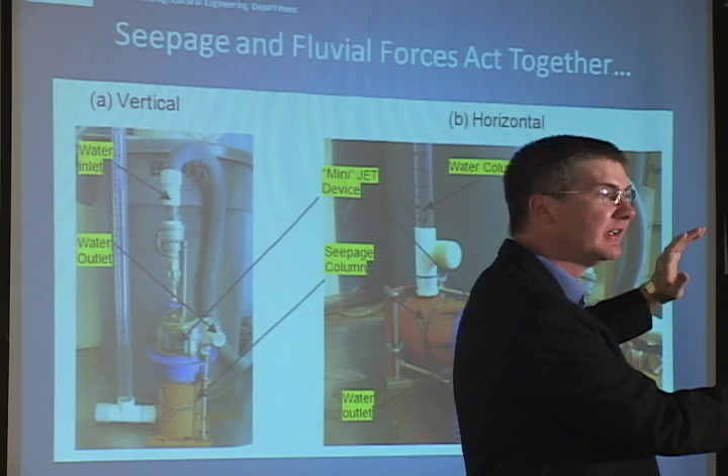The other thing I didn't mention is that seepage forces and fluvial forces act together. Remember I showed you that jet test device where you stick it up on the bank and do a jet test? Well, it's just like digging that post hole. If you do that experiment when it's wet or when it's dry, it makes a tremendous difference. So seepage not only influences the bank causing a collapse, seepage influences the bank by changing the resistance of the bank to erode.

And so we have to know what's going on with seepage in order to understand this. These are some laboratory experiments we did looking at the erodibility coefficient versus seepage, and basically this changes fast. Erodibility increases significantly with seepage.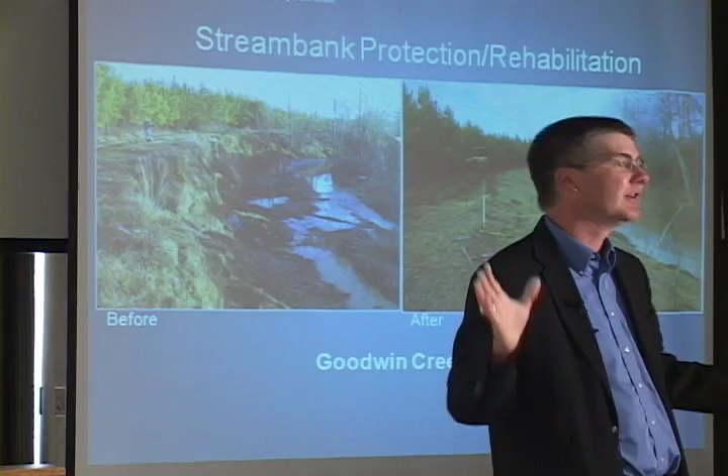So what do you do about all this? You say, Dr. Fox, that's fine, there's lots of mechanisms that can cause collapse, and I like to see collapses, but what can we do about it? How can we stop this? There's really a number of different ways you can do that, and again it really depends. Somebody asked me yesterday, and I said it really depends on how much you want to spend. As an engineer, I think I could slow stuff down, but it really depends on what the cost-benefit ratio is for doing this.

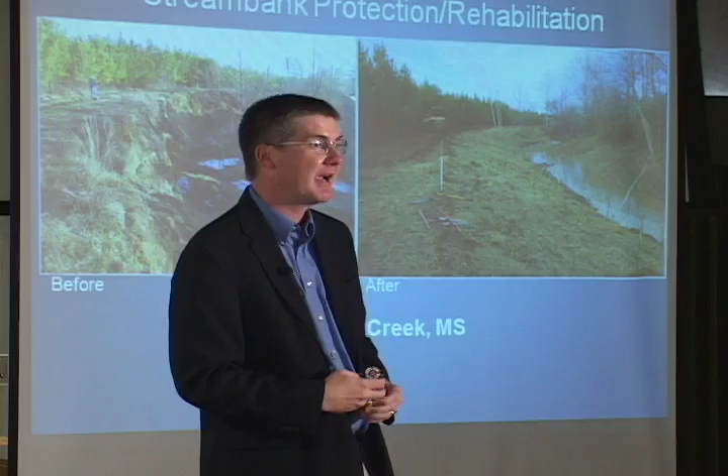This is Goodwin Creek, which we studied for a long time. The landowner came back in and said, look, I think the erosion rates are increasing, I want you to come back in and rehabilitate this. So Andrew Simon and his group did that. They pushed the slopes back - this is commonly what you would see. They went back to a 2-to-1 or 3-to-1 slope, put some mulch down, put in live stakings, and there's toe protection on the toe. So this is one of the ways that we can rehabilitate a bank.

At that seepage project where we were doing the seepage experiments, we actually had to attempt to restabilize the bank for the landowner. We didn't really have to, but we thought it would be courteous to do that. So one of the things we did is we put in some fence postings, put in kind of a retaining wall that would allow drainage, and then we poured a lot of soil material behind this retaining wall, almost to accelerate the self-healing process. We'll see how that works - we just put it in a couple of months ago.

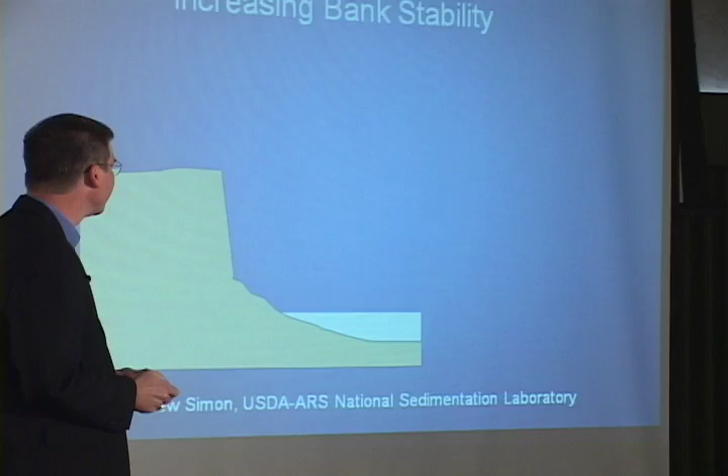If you look in general about increasing bank stability, there are a couple of different ways you can do that. We talked about vegetation before - this shows vegetation on the bank surface, on the bank top. It's also important to have vegetation on your bank face. So that's one way.

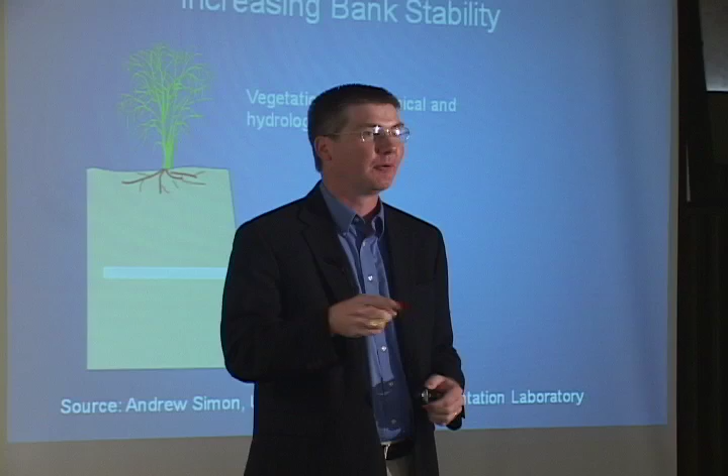From what I understand, you guys have a lot of drainage in Minnesota, and I've done a little drainage work with Iowa State. We've got a USDA project. Drainage is something that helps banks. In fact, the National Sedimentation Lab in Mississippi spent several years doing a study where they put drain pipe underneath their banks. It was connected to a well, and when the water level got up high enough in the sump, the well would turn on and pump the water back into the river. The results, from what I understand, showed that there was increased stability. We know that if you take pore water pressure out of the bank, it helps increase the strength of the bank. So that's one way.

Another way is toe protection, and there's a number of different ways to do toe protection. You can do the green, environmentally friendly way, which is the use of large woody debris structures or other things like that. Or you can do hard structure toe protection - some of you guys may have J-hooks and things like that that divert the energy off of the toe. So there's different ways to increase bank stability.

One of the things I would mention here is that not all these techniques can be applied the same way in every location. You have to consider what processes are going on at your location to understand how to best stabilize this.

The other thing we talk a lot about, and this is the last thing I'm going to talk about, is riparian buffers and vegetative filter strips. These are very good practices in the right places, and it's a matter of understanding why it's the right practice in the right place.

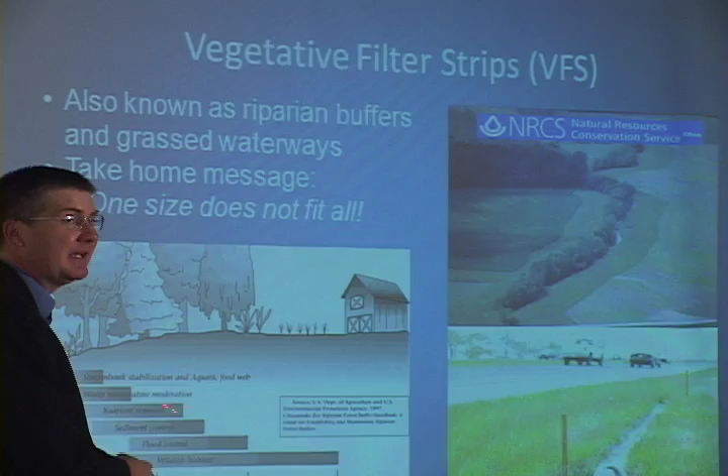We can do that through some modeling. In other words, one size does not fit all, because our objectives may be completely different. This is from USDA. If we're looking at just stabilizing stream banks, maybe we only need a certain length of buffer. If we're looking at nutrient removal, maybe we need a different length of buffer. So based on that objective, maybe we need to think about that.

The other thing is that we have to consider the processes. Filter strips basically work because they increase resistance to flow, and when you increase resistance to flow, it slows it down.

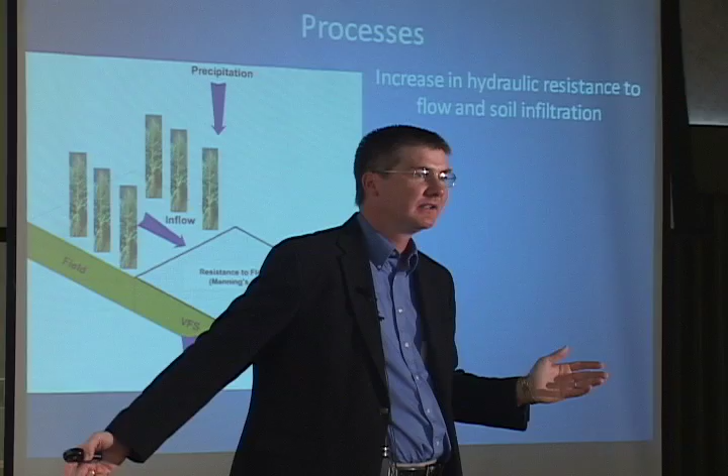You guys ever play football and had that little bungee cord thing? One person would take off running, the other guy would stand back there and take off running. It was supposed to increase your stride. I was 6'4" and slow—it didn't help me at all. But that's resistance.

Resistance helps slow down the flow, and it helps water infiltrate in that soil. When that overland flow slows down, you delay it, and when you delay it, you drop out sediment and particles from that material, and it decreases the transport capacity of that flow. You can get deposition within that filter.

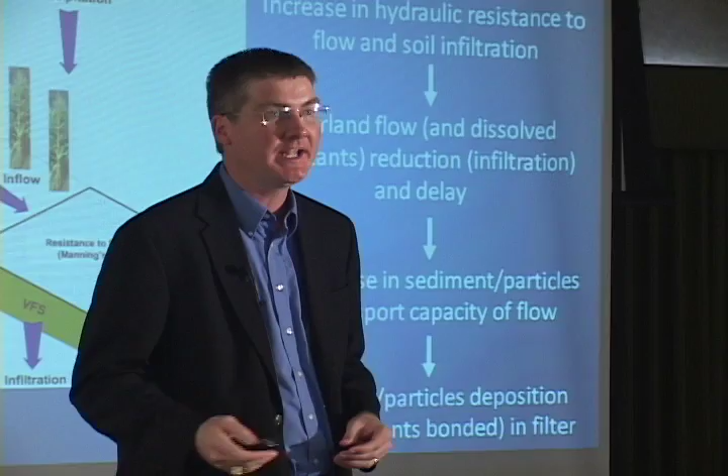Now, filter strips are deposit areas. They need to be maintained over time. You can't just put them out there and be done with them—they have to be maintained.

What I would also say is that infiltration is the key. If you try to put a filter strip in waterlogged conditions or where you've got problems with soil compaction, it's not going to work. That water needs to slow down and go into the soil, so we need to be careful about where we're putting these things.

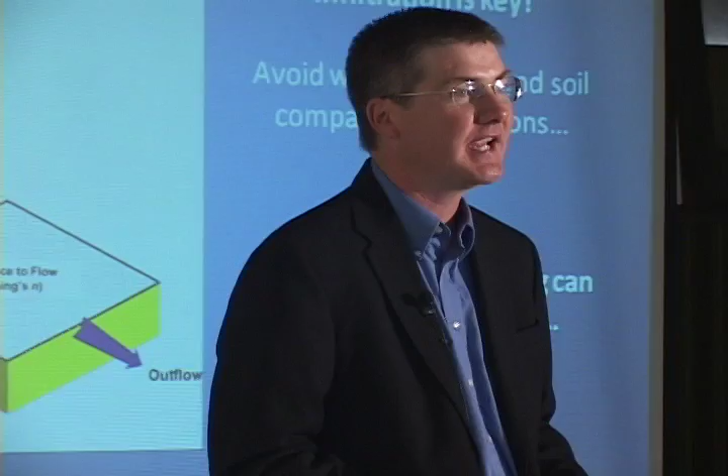I wasn't going to go into it today, but there's a lot of process-based modeling. There's a model called VFSmod, the vegetative filter strip model, developed by a researcher at the University of Florida—part of his dissertation was at North Carolina State. It models flow and sediment. You can put your soil type in, look at all the different things, look at infiltration capacities, and predict how much flow and sediment reduction you get.

We need to use these tools to design things, in my opinion, instead of just simply specifying that we need a 50-foot buffer. One size does not fit all.

The other thing I would say about a buffer is concentrated flow. When you have flow that concentrates, if you're putting a buffer at the end of a concentrated flow path, and that flow path is just going to cut through the buffer concentrated, it's not going to work. Concentrated flow is the nemesis of all vegetative filter strips and buffer strips that you can have.

I can show you data on sediment and pesticides that Bayer Crop Science compiled a couple of years ago, over 107 different studies, that showed concentrated flow was one of the most significant factors affecting performance of a vegetative filter strip or riparian buffer.

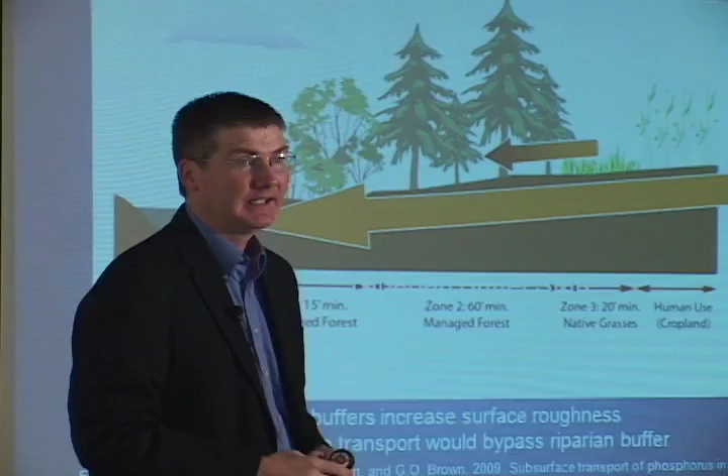One of the things we're dealing with in eastern Oklahoma—Oklahoma is not flat, not all of it. I'll tell you that. The eastern part of the state has the Ozark Mountains. They're not big mountains, not Colorado mountains, but they're hills. One of the things we're dealing with over there is riparian buffers, but we have gravel subsoils.

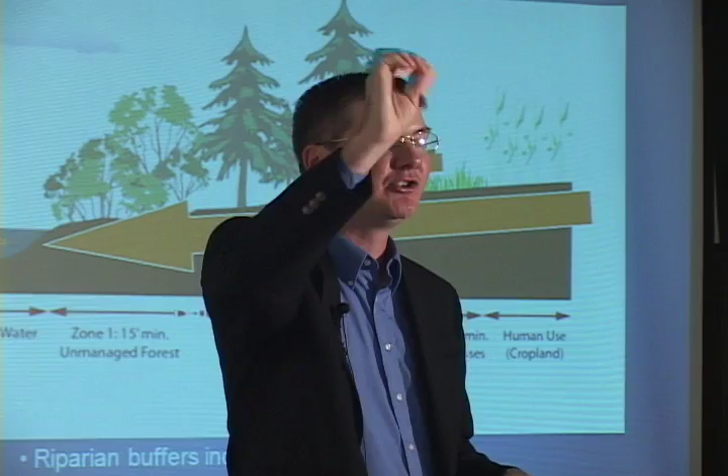Those gravel subsoils, in some places in our floodplains, the gravel will actually come up to the surface. In fact, in our study areas, we can have a 2 or 3 inch rainstorm event, and drive our cars on the floodplain 2-3 hours after it rains without getting stuck. So where's that water going? The water's going down.

And when the water goes down, it hits the gravel underneath and it goes right to the stream. So we have a very active research project funded by the USGS, looking at the fact that if we put these riparian buffers and vegetative filter strips in, is there a pathway underneath that's circumventing the effectiveness of the riparian buffer?

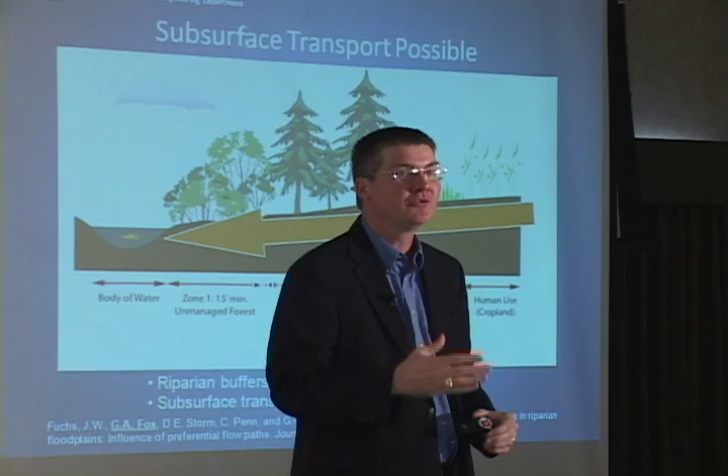I gave a presentation in Brussels talking about vegetative filter strips and this process. I had people from France come up and tell me they don't like buffers because they think this is happening. So don't just go out and blindly say fifty-foot buffer. You need to consider the site-specific conditions.

So let me conclude and wrap up. I didn't talk as long as I thought I was going to. That's good, okay? Lunch is earlier today.

So what I want to tell you is that streams are dynamic systems. It's not about what's happening at your specific stream bank, it's about what's happening within the greater system. Activities at your spot can influence others in different places on your stream system. These stream systems are dynamic, there's a lot of different disturbances. These disturbances can be ag, they can be urban, they can be in channel.

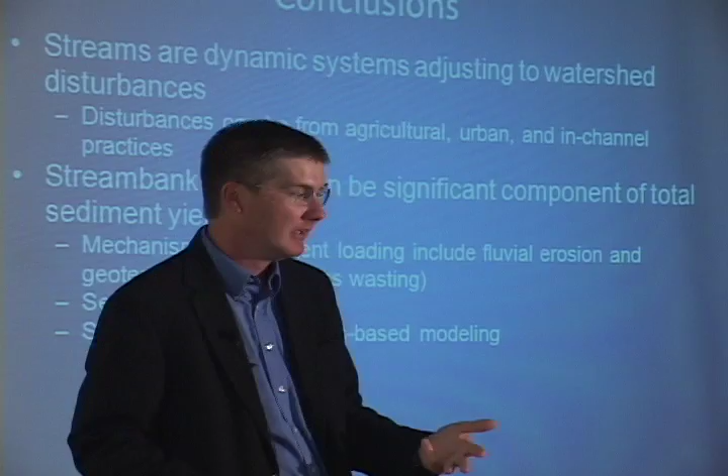There can be precipitation disturbances too, that's something I didn't mention earlier. If your climate is changing, if you're getting heavier rainstorm events over a shorter period of time, you're getting more water that runs off, that's going to change that dynamic. I think what you guys have seen in Minnesota is the same thing we're seeing in Oklahoma. It's the same thing we see in Mississippi.

Sediment or stream bank erosion is a significant component of the total sediment yield that we have. It's a significant component, and studies have been done all over the place looking at that. What I would tell you is that the mechanisms are interrelated. You have flow, you have mass wasting, you have seepage, and activities that you do on the landscape could potentially influence some of these mechanisms.

All that suggests, in my opinion, that we need to consider using some of these tools that have been developed. They're very process-based, not empirical, so they're not dependent on the condition where you're at. As long as you put the information in for your bank, measured for your properties, these models will give you what's going on in terms of the fluvial erosion and the mass wasting. I have a research website, if you're interested in learning more about this information you can go to that website.

A lot of our work, and I should probably acknowledge both the NSF and the USDA, this is an old USDA emblem because that's where we got the funding from. They've supported this work, and we're very excited about continuing on. We hope to continue collaborations with Dr. Gupta, we've already kind of talked about maybe plans for coming back this fall, maybe we can get down in some of those banks and get a little muddy. So, thanks.